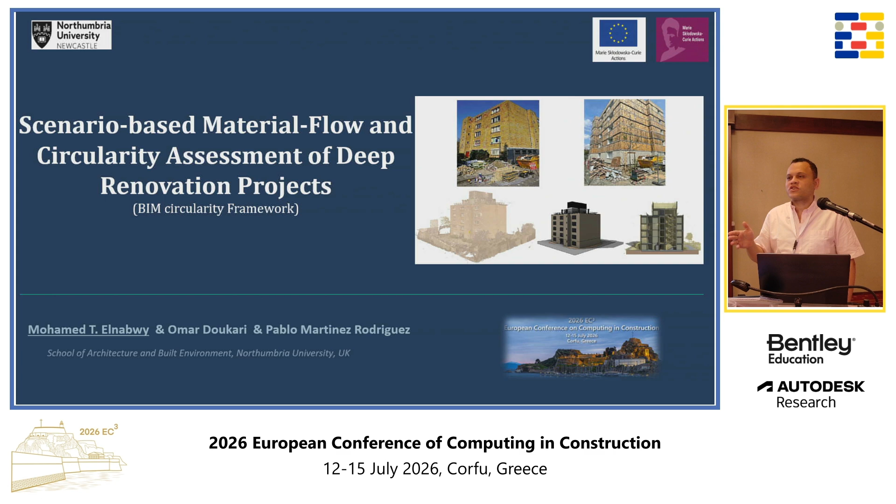And before I get into BIM and the digital details, I wanted to talk about the core issue of construction waste. Nowadays, construction waste management practices are broken. Construction projects are often planned and optimized for time and cost, never for waste. Waste is treated as a byproduct. We quantify it after the fact and never integrate it into planning decisions.

Also, waste is often quantified at project level, not at activity level. So we always know how much waste is generated, but we don't know why and when the waste is generated. And renovation makes this worse. We should consider spatial constraints, resident disruption, and coordination constraints.

On the other hand, circularity always operates at building or system level and is never linked to individual activities or schedules. No scenario-sensitive models exist to evaluate how renovation depth affects circularity rates. And no BIM-integrated models have been utilized to quantify circularity during the planning stage.

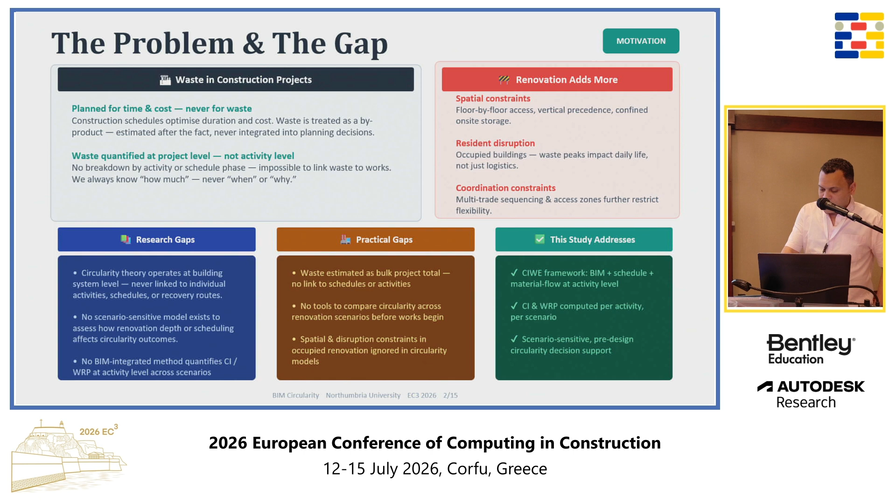To address these gaps, we developed an integrated framework linking BIM with scheduling constraints, including spatial constraints and disruption constraints, along with material flow modeling. We are trying to enhance construction waste management during the planning stage using two indicators, circularity index and waste recovery potential. And we assess how renovation depth affects circularity rates.

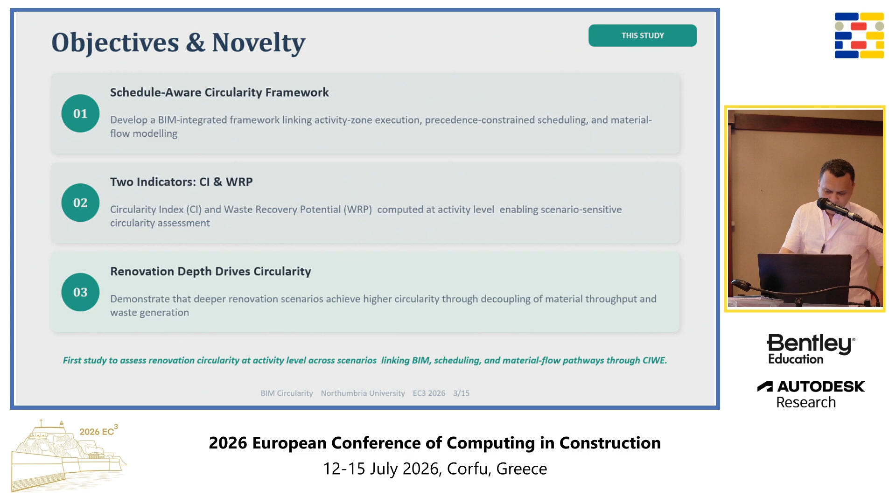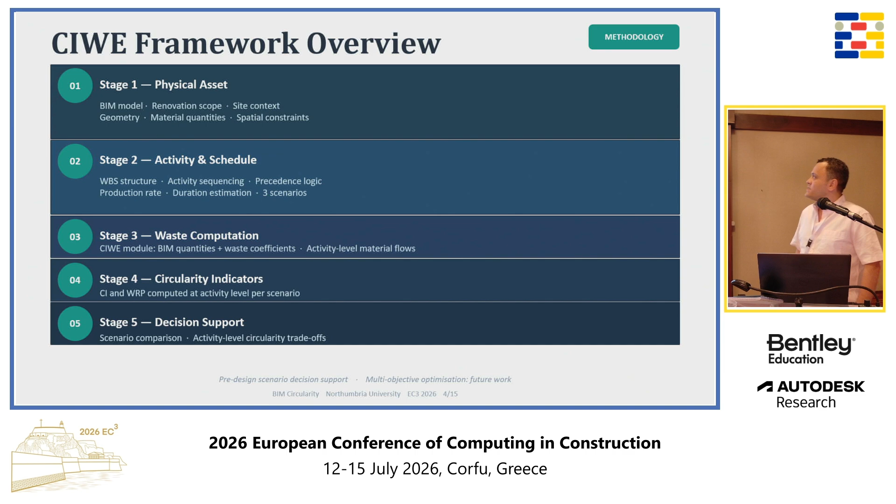To achieve these objectives, we developed a tool called the Circular Intelligent Waste Engine, which we can integrate with any BIM model. The framework has 5 stages. The first stage is the physical asset, including the BIM model, renovation scope, geometry, and material quantities. The second stage relates to defining the activities through a work breakdown structure, considering production rates of renovation activities, and calculating activity durations as total quantities divided by production rates.

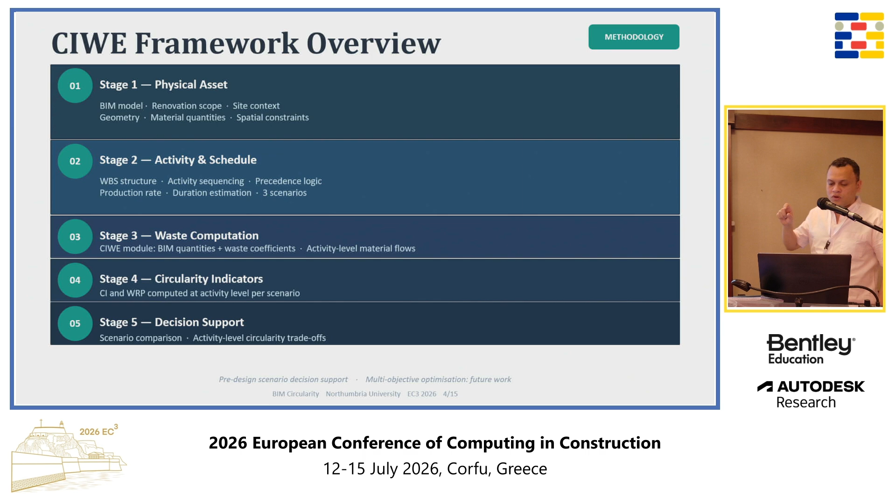The third stage is about waste computations. We quantify waste using the quantities extracted from the BIM model, and we add the expansion waste coefficient to calculate the real volume of waste at activity level. Then we use the extracted data to quantify the circularity index and waste recovery potential. And finally, we develop a pre-design decision support tool by performing different renovation scenarios to find the optimum scenario.

We tested our framework using a real French case study: a residential building with 30 apartments, 5 floors, and about 1,120 square meters. The building was occupied during renovation. We developed a BIM model with a level of detail 350 to apply our framework.

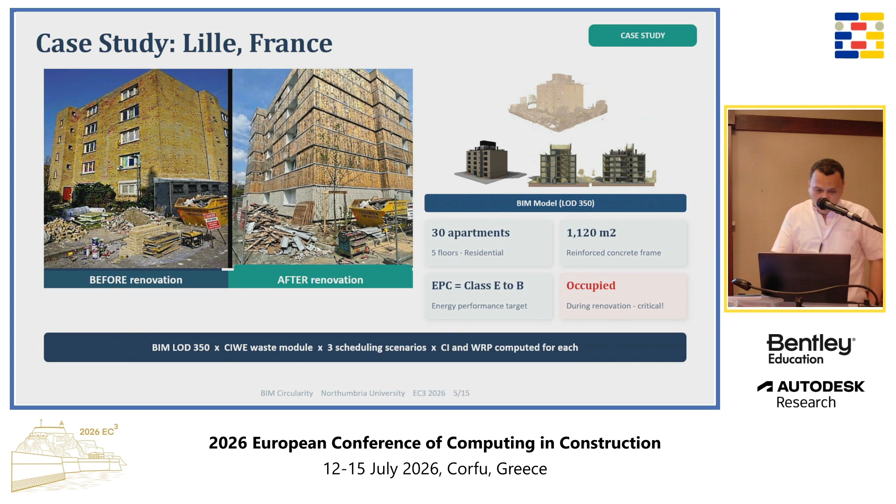We ran 3 scenarios with different criteria. The first scenario's scope is to perform renovation of envelopes and heat pumps with ventilation. In the second scenario, we implemented the same renovation activities as scenario 1, but it changes the ventilation system to mechanical ventilation with heat recovery with solar energy. The third scenario builds on the second with thermal solar. There is also a difference in the construction process for each scenario regarding how many activities work in parallel.

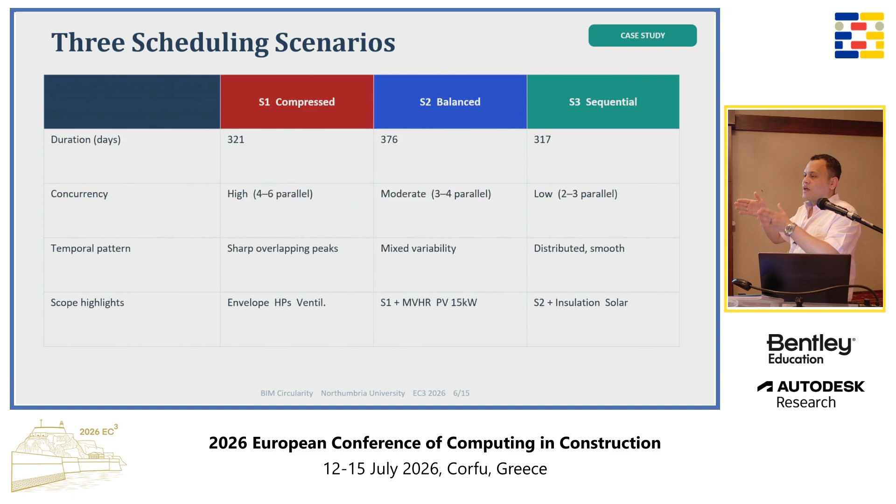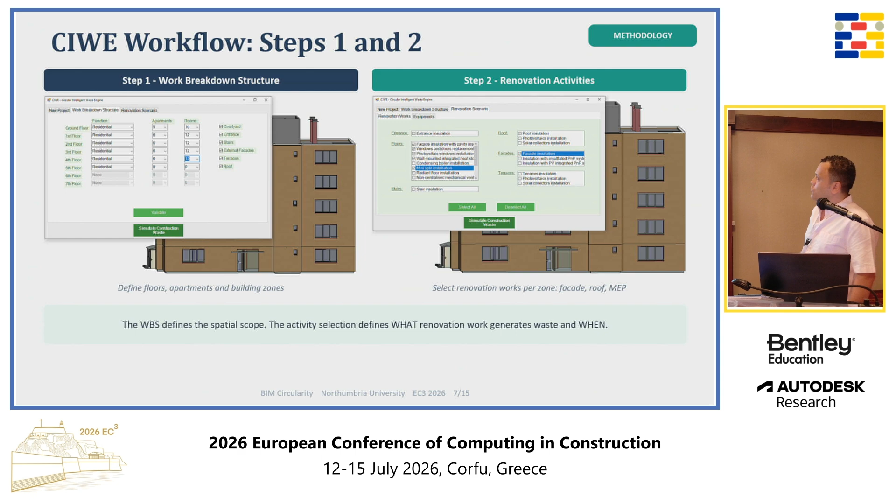The first step for our framework is we build our work breakdown structure by defining each activity per zone in each floor. And this produces the activity zone matrix to show the spatial distribution of renovation works. We also use the precedence network to define the vertical and horizontal sequence constraints.

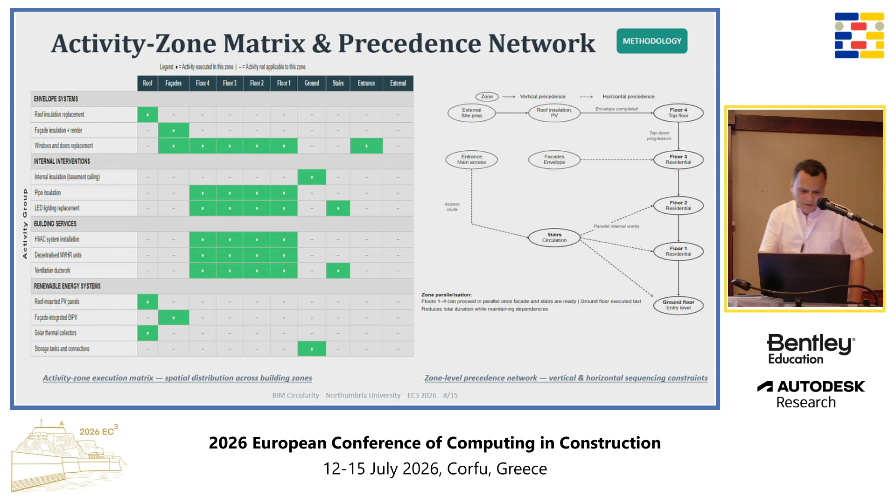We also define the type of equipment we will use during renovation projects, because each tool has a unique daily waste generation. The main objective of the circular intelligent waste engine is to bridge the BIM model with renovation scheduling, considering spatial constraints specifically.

The main output of the tool is to quantify and calculate the daily waste time series per activity. We use this daily waste time series as inputs to calculate the circularity index and waste recovery potential, using coefficients derived from previous studies and informed expert calibration.

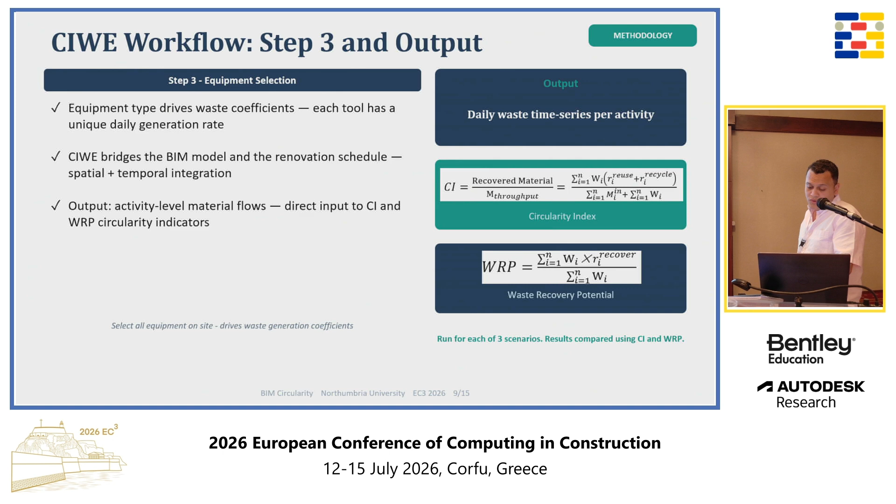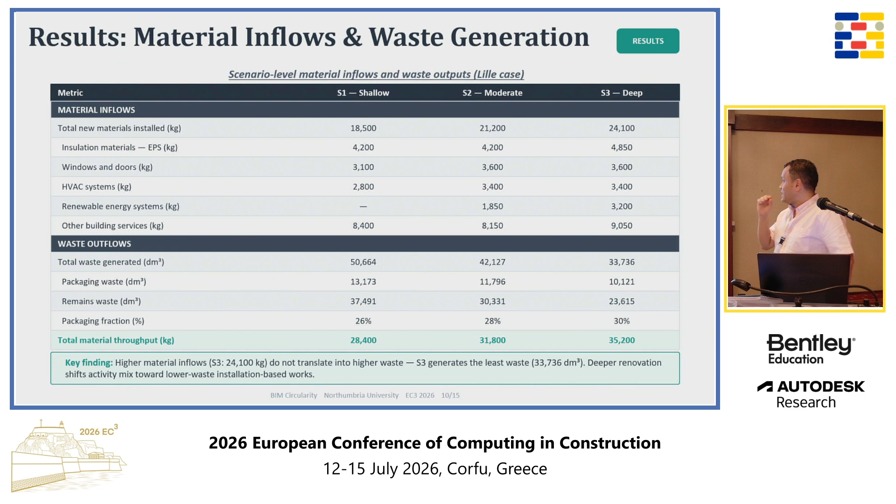Looking at these results, you can find that the third scenario uses most of the materials, but however it generates the least quantities of waste. That's because installation-based works generate less waste than demolition-based works. This means that higher material inflow doesn't ever translate into higher waste, and deep renovation shifts activities towards lower waste in installation-based works.

This figure shows where the waste goes. You can see here that out of the total quantity, which is 42,000 cubic decimeters, about 25% of this waste can be reused, and about 46% of this waste can be recycled. This gives us about 71% that can be recovered.

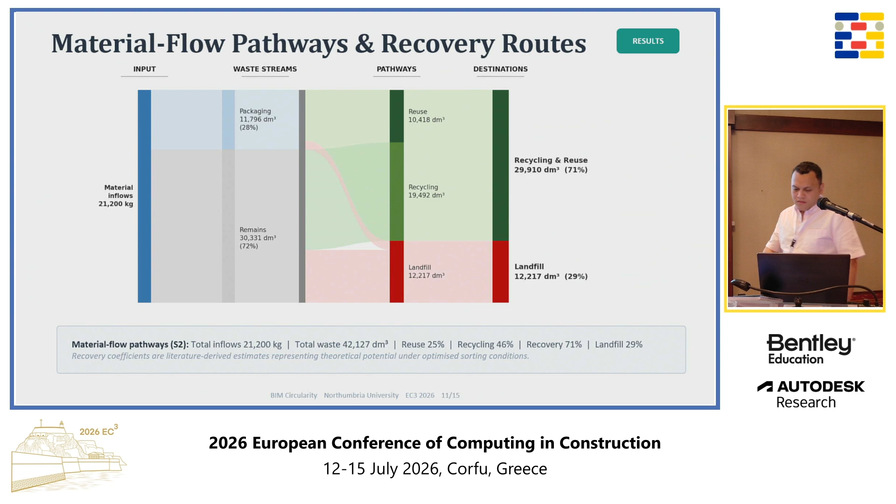If you look at the daily waste generation profiles across the three renovation scenarios, you can see that the first scenario, shown as a solid line, peaks at about 377 cubic decimeters per day. That is about 2.8 times higher than scenario 3, which is smoother and flatter.

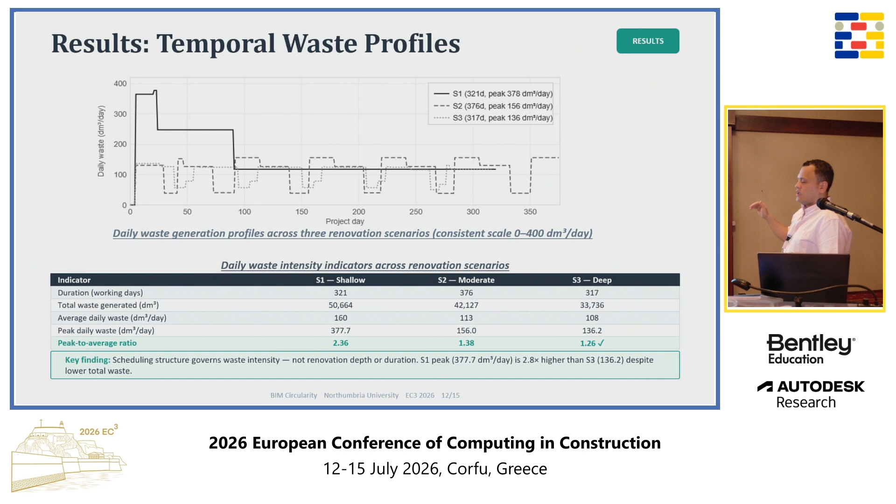This gives us an important point: scheduling structure controls and governs the waste intensity, not the renovation depth or duration.

Finally, regarding the circularity index, we can see that it has increased from 0.58 in scenario 1 to 0.65 in scenario 3, with a total improvement of about 12%.

Regarding waste recovery, we can also notice that the waste recovery potential has increased from 0.67 in scenario 1 to 0.74 in scenario 3, with a total improvement of about 10%. We found that the third scenario achieves the highest circularity index and waste recovery potential.

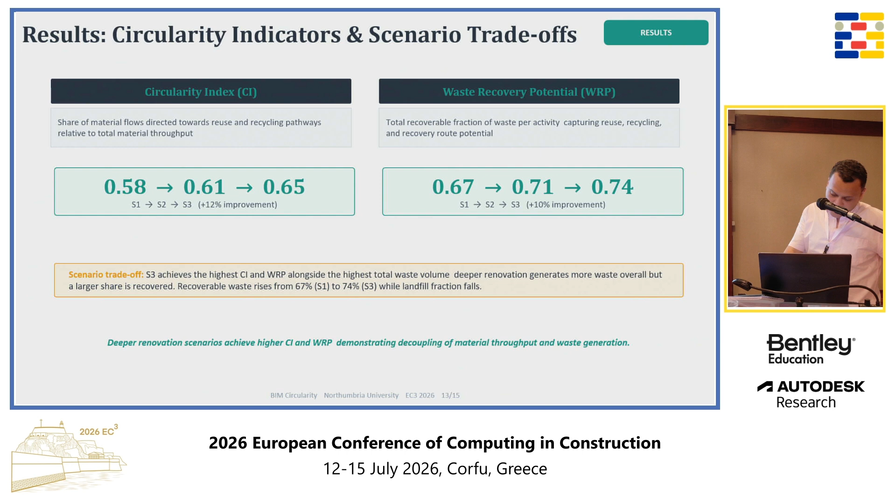This means that deep renovation scenarios achieve higher circularity index and waste recovery, demonstrating the decoupling of material throughput and waste generation.

The main conclusion is that we have developed an integrated framework that links BIM with an automated tool to enhance construction project scheduling by considering spatial constraints during the planning stage. We also show how circularity indicators can enhance construction waste management practices during the design and planning stages, and we have developed a pre-design decision support tool.

This tool helps enhance construction waste management practices in general, and also enhances the operational resilience of the construction process during the planning and design stage.

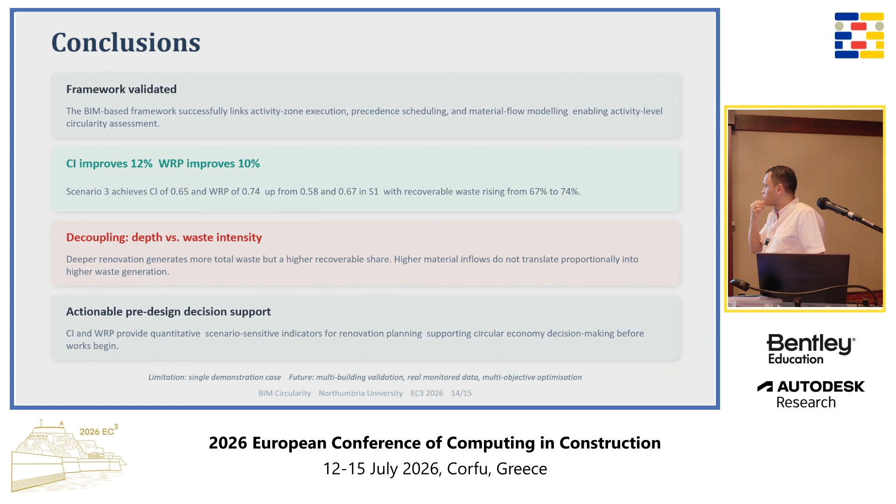Regarding its limitations, this is a single demonstration case, and we need to test it in multiple buildings. In future work, we plan to quantify recent disruptions and perform multi-objective optimization to find near-optimum scenarios for renovation, and to develop operational resilience indicators to enhance construction waste management during the design and planning stage.